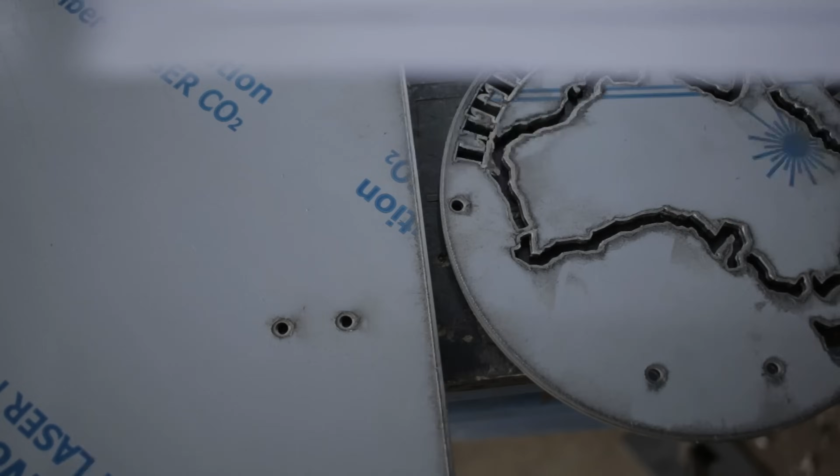Anyone who's ever designed and built something from the ground up knows it's not hard to build yourself into a corner and make something unbuildable. There are aspects of this I'm concerned about, though when I pulled the trigger on all these laser cut parts, I was pretty confident I'd be able to put it together. But now looking at it all in front of me, I'm feeling a little nervous, but there's only one way to tackle this, and that's head on.

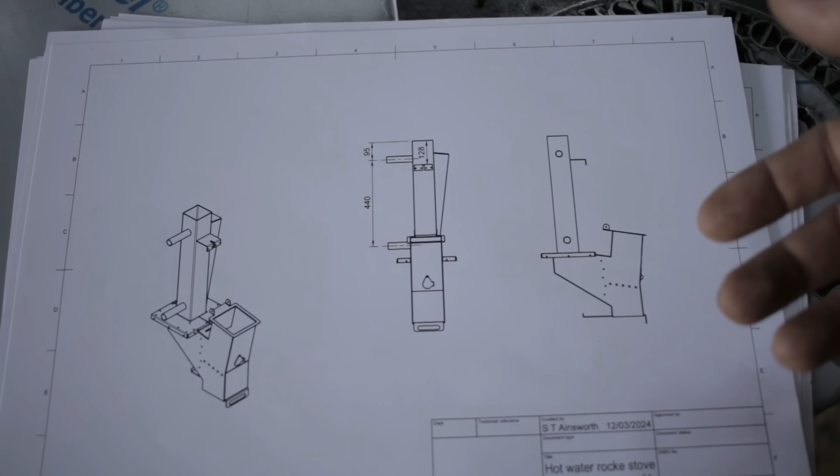I'm going to start with this guy, the burn chamber and riser. I've taken lessons I learnt from the last design and incorporated some features I built into the potbelly stove, hoping this will cope better with long burns, able to run continuously for people who might want to use this in colder climates. And we're going to start with this.

I'm already regretting some of my design choices. For instance, there's going to be a part that goes in here, so it's just going to be a pain to weld once I get...

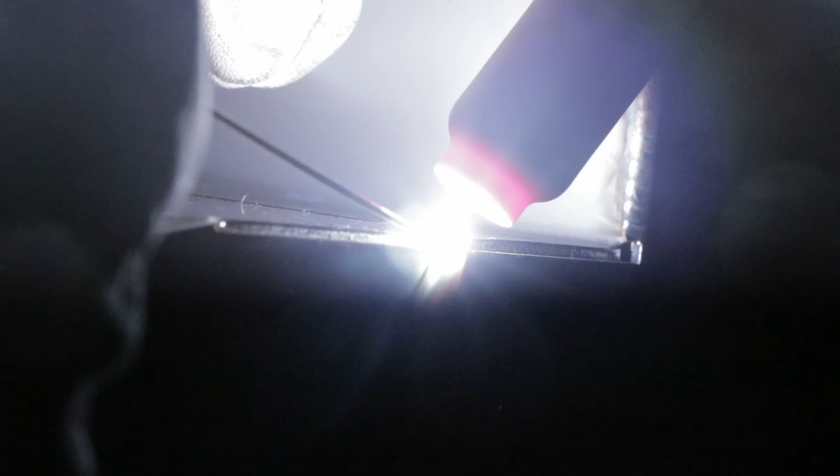You might have noticed I used filler wire on these two welds, because on this part of the burn chamber, it's where it's going to experience the most amount of heat and therefore the most amount of stress.

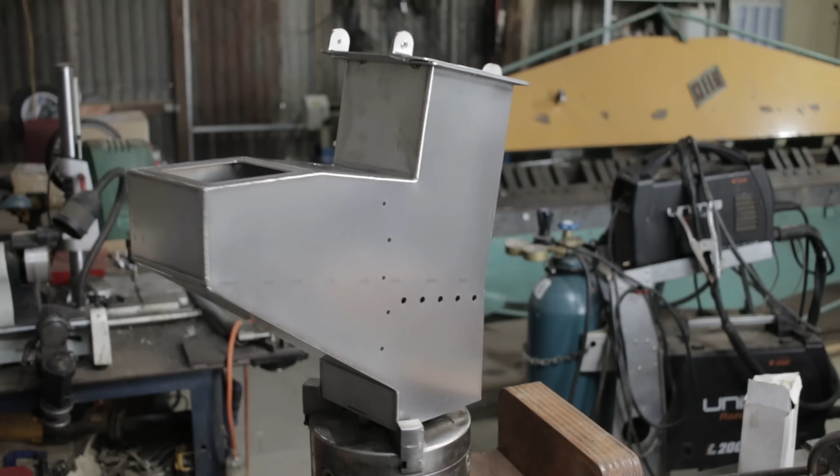Something one of you pointed out in the last video was that the stove was suffering from not enough airflow, and that was causing the wood to burn back up into the hopper. I couldn't agree more. So this has just gained 300 mil. The riser was going to be 700 long - it's now 1 meter.

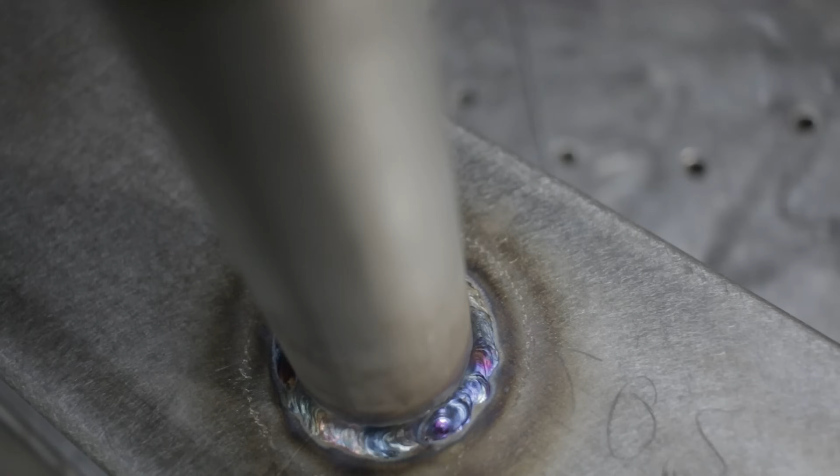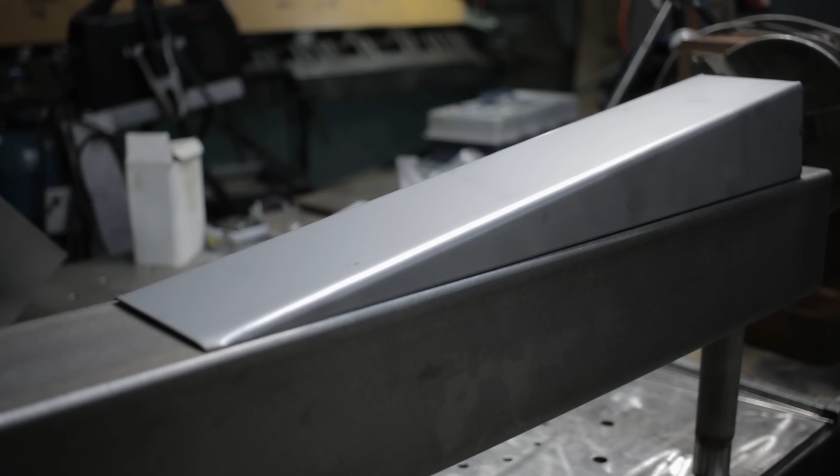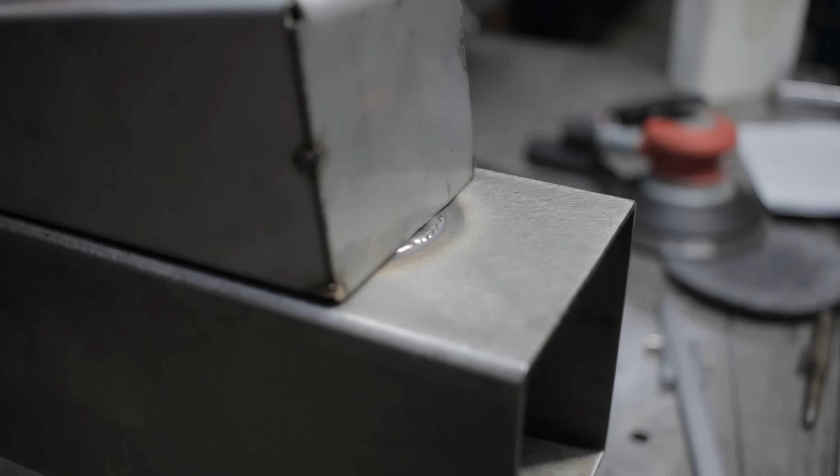So this is the new heat exchange. As you can see, we have a slope design, and I'm drawing a lot of inspiration from the Benghazi boiler or Kelly kettle. The heating chamber is very thin and it gets larger. We're heating a very small amount of water, which is good. This is closer to the heat source, so that's going to get really hot really quick, and we're gradually building up. The one thing I want to be really careful about is getting the top of this chamber sitting just about there, so we never really get an air bubble building up, which is something I'm a little concerned about.

So gas is going to come up through this hole and fill this entire chamber, so that as I'm welding on the outside, the gas is going to be shielding the weld on the inside the same, if not better. This is going to really help with the strength of the weld. It's also going to help with its corrosion resistance, and purge welding is the proper way of doing this.

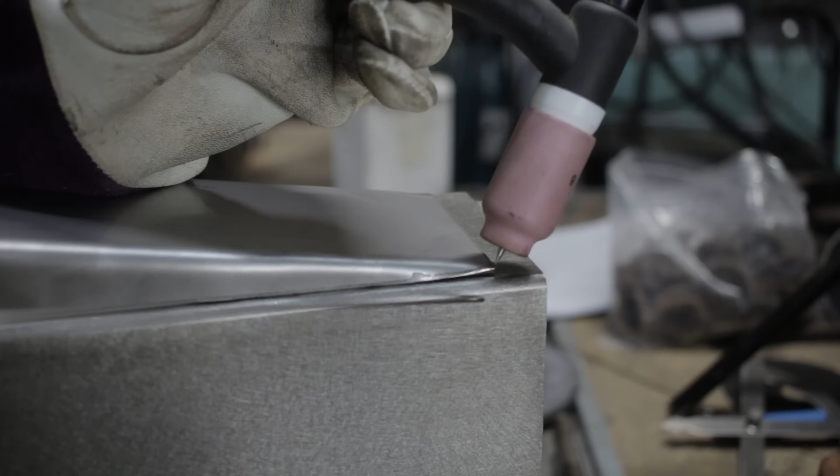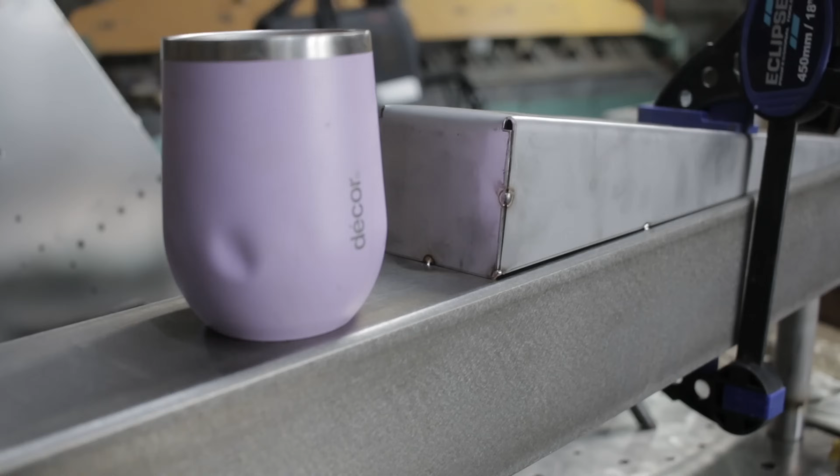So I'm going to have a cup of coffee while I wait for this thing to fully purge out. And yes, this is my wife's cup. Don't tell her.

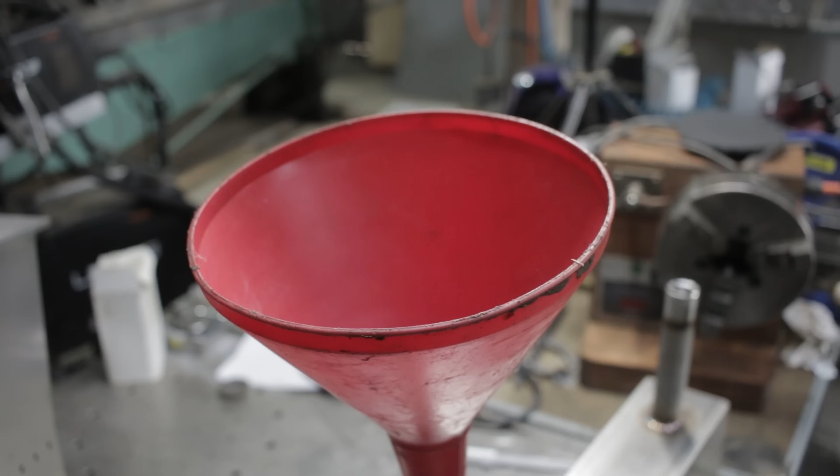Oh yeah, and just like that, we're done. The prudent thing to do now is to just make sure that it actually is watertight. Yeah, okay, well, it's full.

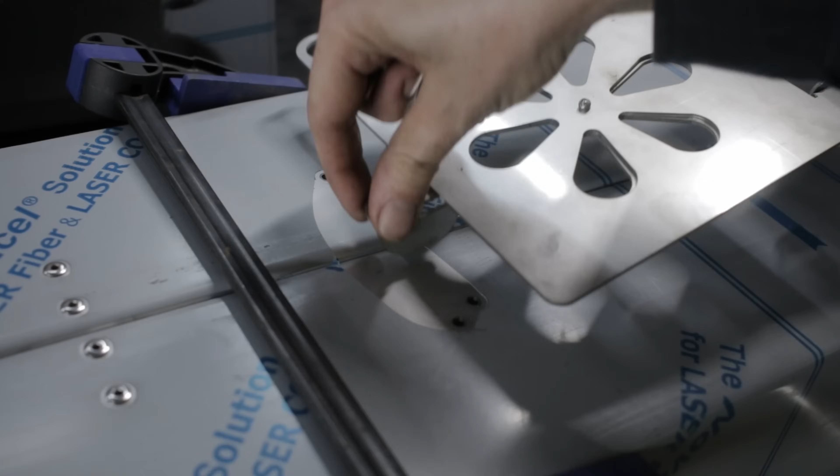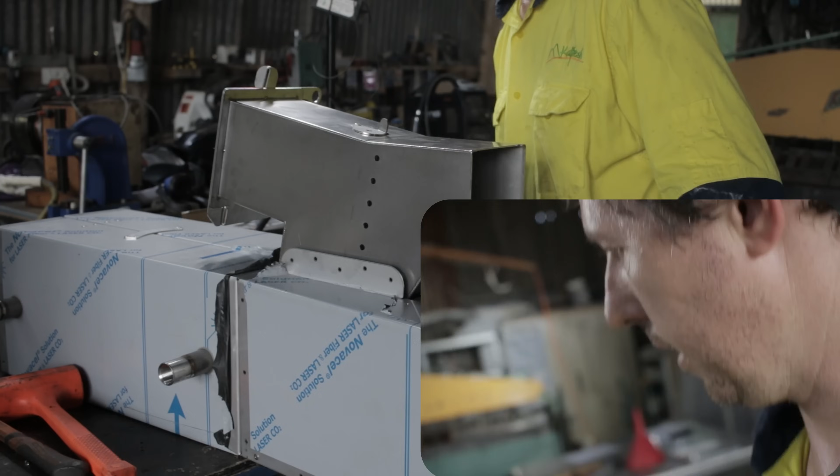I'm not sure how to film this and actually make it seem interesting. I'm just trying to get each rivet lined up, and every little bit of error I've introduced into the system, it all accumulates to this, where the holes are jolly close, but just not close enough to go through. This was cut, well, 7 months ago, and since then I've got my clearances a little bit more refined. I don't usually have this sort of problem, but this is an older design.

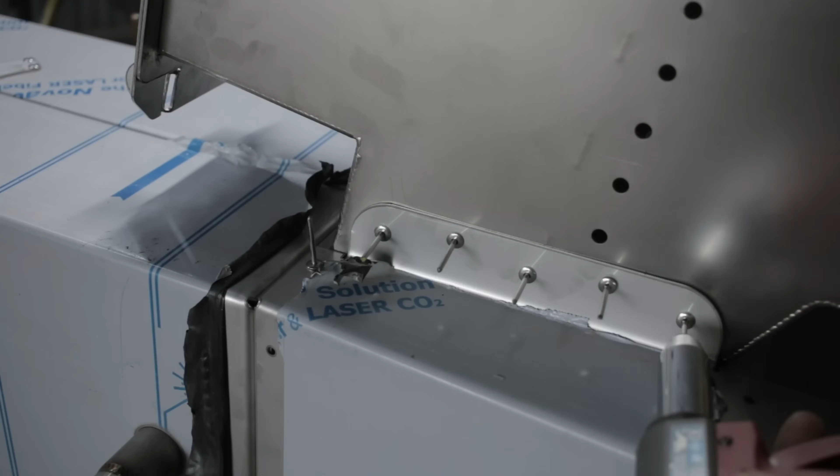Marge, it's those jolly kids on the roof again eating corn.

I'll try and jam some insulation in there.

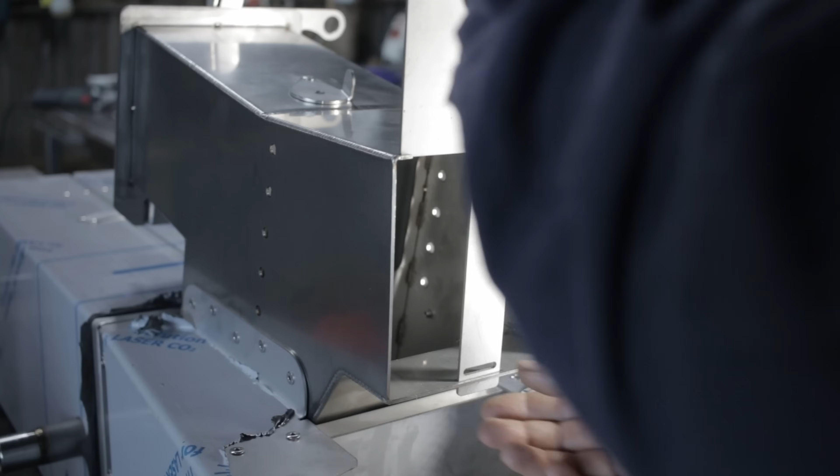So this is the maybe controversial bit. We're looking down inside, around the riser - that's the water heating chamber. I was going to pack this thing full of insulation, and then I stopped and thought about it for a minute. There's advantage to that, in that we'd keep all the heat contained inside the riser, which creates better draw. But then I thought, that pretty much means that if the insulation does its job, we're only heating this chamber from one side. What if all the heat generated from this riser was heating this from every side? I'm starting to think - and I'll have to test this, this is just my thoughts right now - that if I leave this uninsulated, the heat generated all the way around the riser, instead of being contained, will heat more of this, theoretically. I need to give it a go. Plus I kind of want to be able to take this cap off and check how it's going for the testing process, so if this doesn't have insulation in it, that makes it a lot easier, and I'm not handling fibrous, nasty insulation.

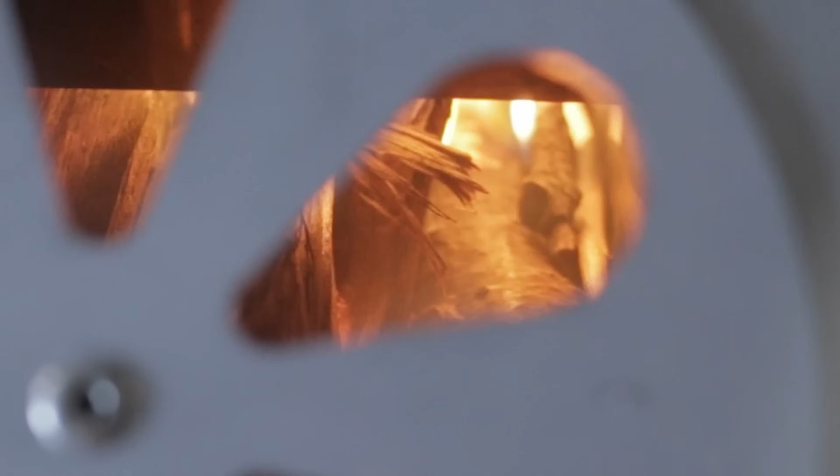That's a mixture of hardwood, pine, just whatever was laying around. I just threw it in there any which way, because if it can't handle that, it's not going to be very easy to use, and that is doing a wonderful job.